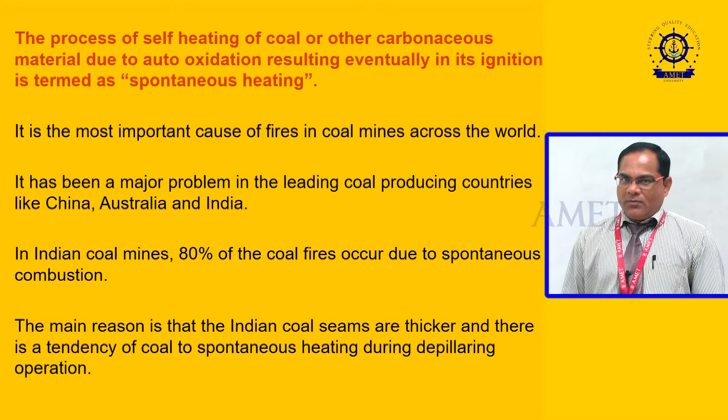Now, there are many factors which affect spontaneous combustion or heating. Mainly two factors: intrinsic factors and extrinsic factors. Intrinsic factor is the nature of the coal, that depends on the seam factor and coal factor, and another is extrinsic factor, that is atmospheric factor, geological factor and mining factor, that is the mining system and how we are conditioned.

Now we will go through the extrinsic factor in detail, that is climatic condition. It depends on the temperature, moisture, humidity, barometric pressure and oxygen concentration. If oxygen concentration is more, spontaneous heating will take place faster. Temperature also affects it. If the atmospheric temperature is more, it will support the spontaneous heating.

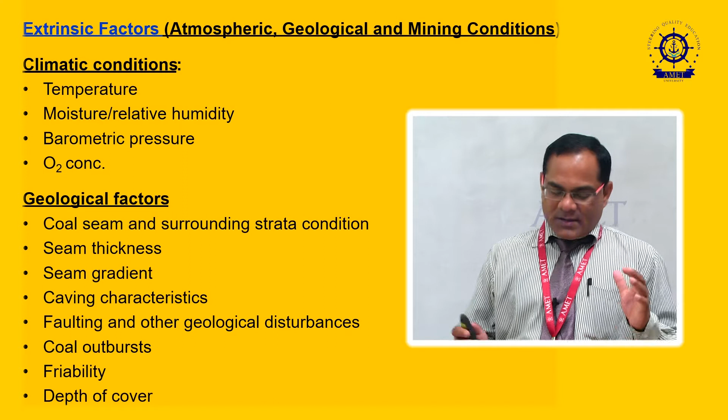Next is geological factors. Geological factor means how the coal seam is surrounded by the strata. If there are faults and fissures, it will support the spontaneous heating due to air leakage around the coal seam. Then the seam thickness is also very important, because if the thickness of seam is more, it is prone to spontaneous heating, because the surface area for the oxidation process is more.

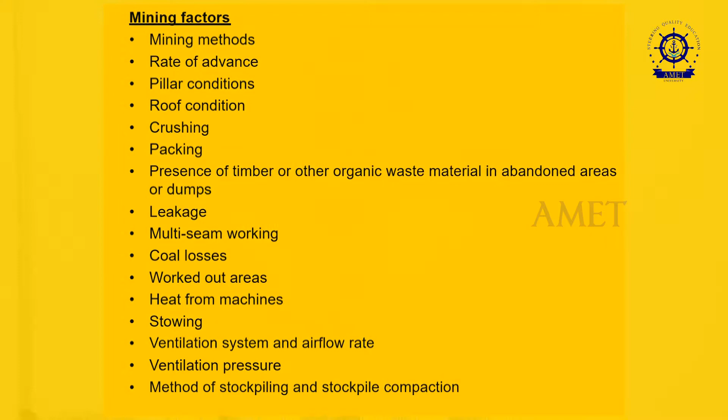Next important factor is mining factors, that is mining methods, rate of advance, pillar condition, crushing of pillar, packing, dumping system, leakage of air, whether it is multi-seam working, coal losses in the goaf area, worked out areas, heat from the machines, stowing system, ventilation system and air flow through the mines. These also greatly affect spontaneous heating. Depending on the mining method, it will affect the spontaneous heating more.

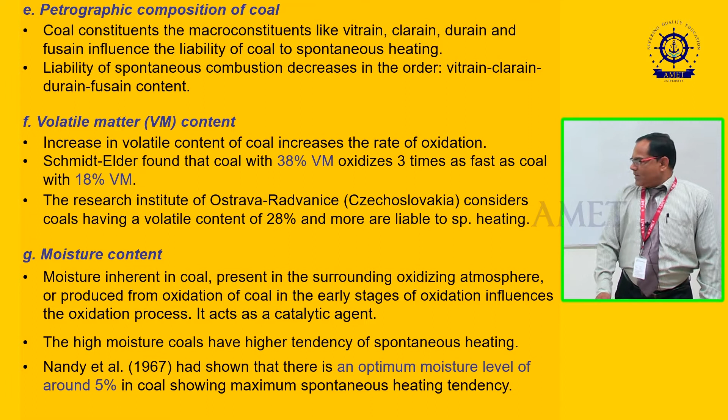Then another thing is crushing. Next is volatile matter content and moisture content. If the volatile matter is more, the rate of oxidation increases, and if the rate of oxidation is more, the spontaneous heating will take place faster. Then moisture content. The moisture content of the coal influences the oxidation process. If the moisture content is more, the tendency of spontaneous heating will be more.

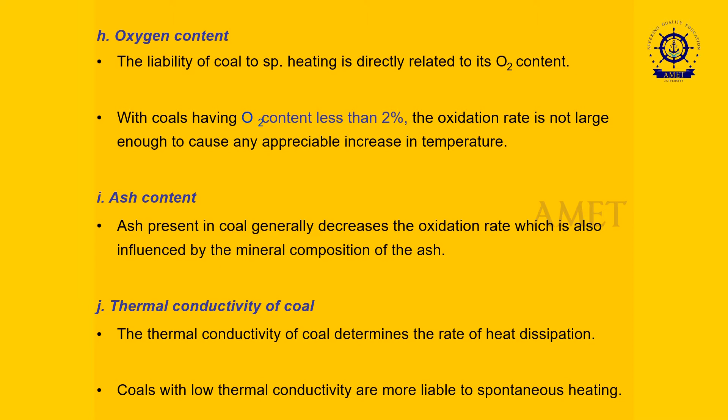Next point is oxygen content. If the oxygen content is more, it will definitely affect the spontaneous heating. The rate of spontaneous heating will be more. If the oxygen percentage is less than 2%, it is not going to affect the spontaneous heating rate. Then ash content. If the ash content is more, the oxidation rate will decrease.

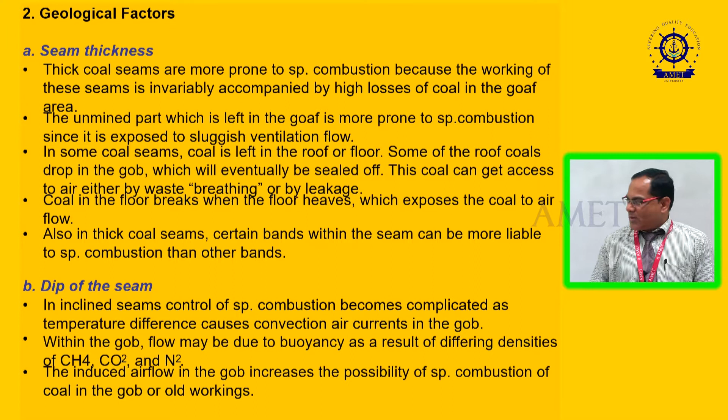Next important factor is seam thickness. If the coal seam thickness is more, it is definitely going to cause more spontaneous heating, because it has a large area of oxidation. Then dip of the seam. If the dip of the seam is more, the spontaneous heating will be more, because the rate of air ventilation will increase.

Next point is depth of cover. If the coal seam is at shallow depth, due to fractures or cracks the air leakage will be more and it will support the spontaneous heating. Therefore, the rate of spontaneous heating will increase. And if the coal seam is under immense pressure, it will also support the spontaneous heating.

Next point is presence of multi-seam. If we are working in multi-seam, it is prone to spontaneous heating, because a lot of fresh coal is exposed to fresh air. Next point is caving character. If the strata has the tendency to cave in, it is going to affect spontaneous heating. Then faulting. If there are faults in the coal seam, it will support the rate of oxidation, so it will increase the spontaneous heating rate.

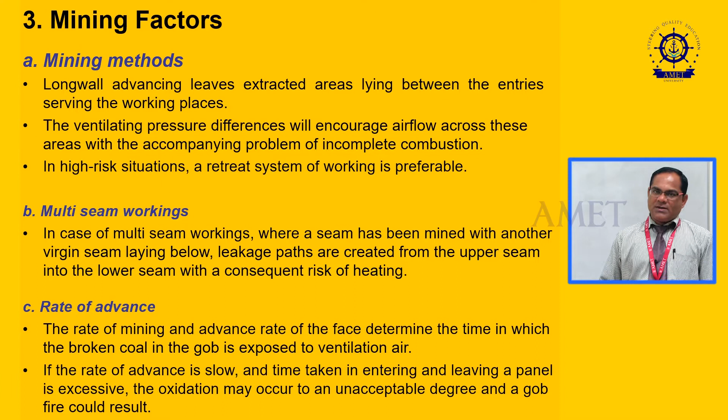Next factor is mining methods. Suppose in the longwall advancing method, the area between the entries is extracted, and if we are leaving coal, it is prone to spontaneous heating. That is why the retreat method is preferred. Next point is multi-seam working. In multi-seam working, there are more chances of spontaneous heating, because more coal is exposed to fresh air.

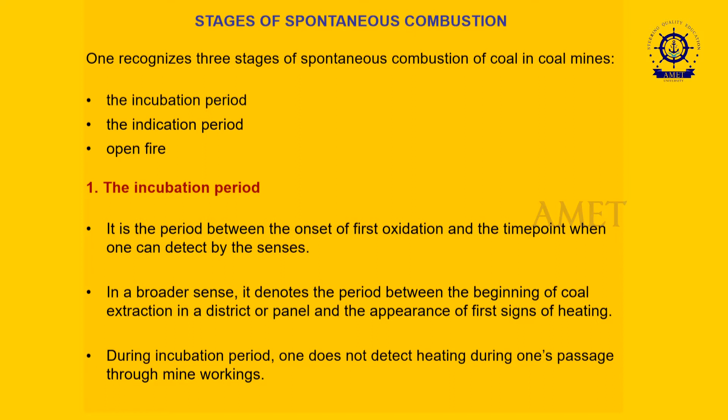Now we are going to see the stages of spontaneous combustion or heating. There are three main stages: the incubation period, indication period, and open fire. What is the incubation period? This is the period which gives the sign of first oxidation, the time which we can detect with our senses, like by eyes or by smelling. We can see with the eyes, and we can sense some smell. The incubation period depends on the following factors, that is the character of the coal.

So, what type of coal it is? The character means the rank of the coal, what are the contents there in the coal. So, it depends on the characteristics of the coal. And next is seam thickness, whether the seam thickness is thin or very thick. The incubation period depends on the thickness of the coal seam also.

Then the nature of the immediate roof. So, what is the immediate roof, that is shale or sandstone, it also affects the rate of spontaneous heating, that is the incubation period. And another important factor is regularity and continuity of the working, that is whether the mining work is going on continuously or intermittently, whether there is any breakage or halt. If there is a halt, the incubation period will increase and it will support the spontaneous heating actually.

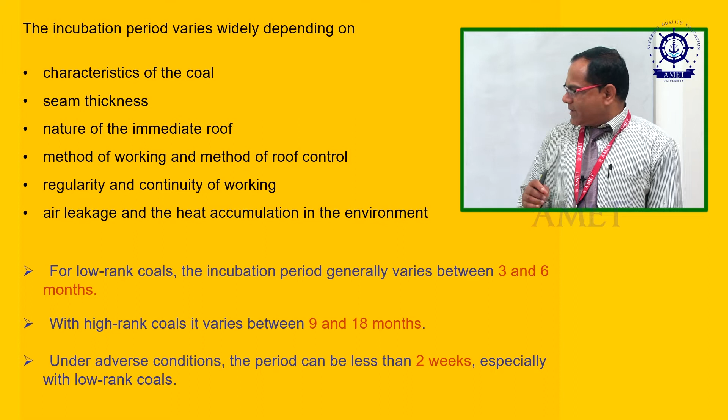And next important factor is air leakage and heat accumulation in the environment. If the heat is accumulating and the proper ventilation is not there, the incubation period will be affected. So, there should be proper ventilation. So, suppose for low rank, the incubation period varies between 3 to 6 months. That is, the low rank coal is supposed to be prone to more spontaneous heating. That is why it has to be extracted or depillared fast.

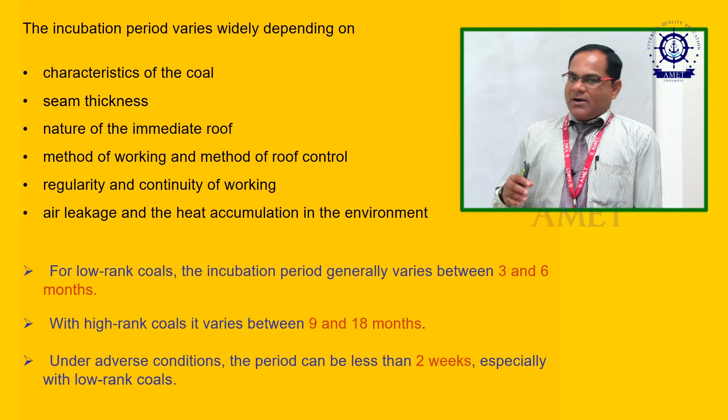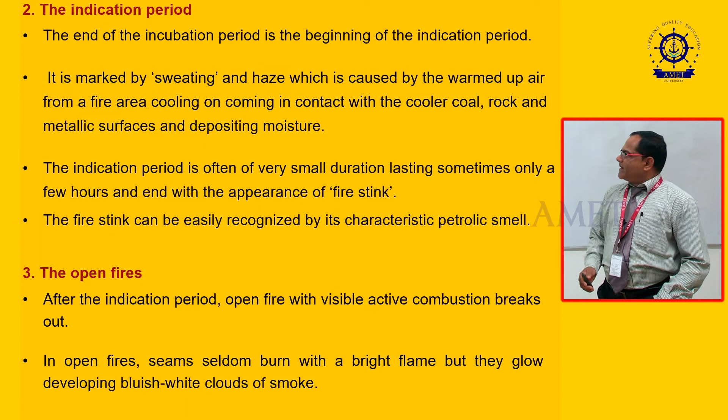Then with high rank, the incubation period varies between 9 to 18 months. So, it can stay longer, and accordingly we have to adopt the mining methods. Okay, the next stage is the indication period. Actually, when the incubation period ends, this period starts. So, it is marked by sweating or by haze in the environment.

Actually, due to the heating process, moisture sweating means on the cold surface we can see water droplets, due to the warming up of air. Because the air warms up, this sweating will start. But this stage stays for a very small period, so we may not observe it, and it ends with the appearance of fire stink, meaning a particular type of stinking smell will come.

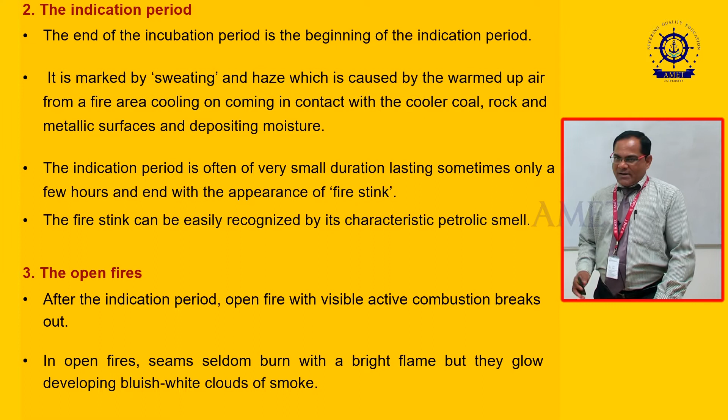And next stage is the open fires. After this indication period ends, the fire can start at any point of time. So, in open fires, the seam does not burn with a bright flame, but it glows, developing a bluish and white cloud. Then the next point is how we will detect the spontaneous combustion.

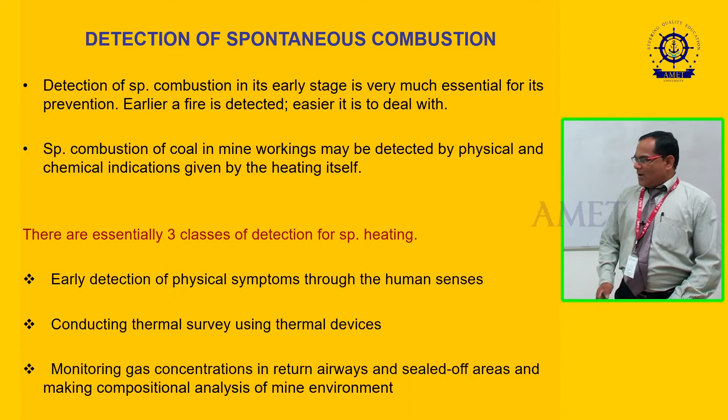Actually, the detection of spontaneous combustion at an early stage is very essential to prevent mine fire. So, it can be detected physically or by chemical indication. There are mainly 3 classes of detection for spontaneous heating. Early detection by physical symptoms, through our human senses. Next is conducting a thermal survey using some thermal devices, and next is monitoring gas concentrations in return airways and sealed off areas and making compositional analysis of the mine environment.

So, how can we do the early detection? Through our physical techniques. This is the oldest technique for fast detection of heating. So, development of heating in a goaf area is generally accompanied by the following: haze, meaning a smoky atmosphere where we cannot see, then sweating of the strata, gob stink or fire stink, sound, a cracking sound, then smoke, and finally the fire. So, these are the physical symptoms.

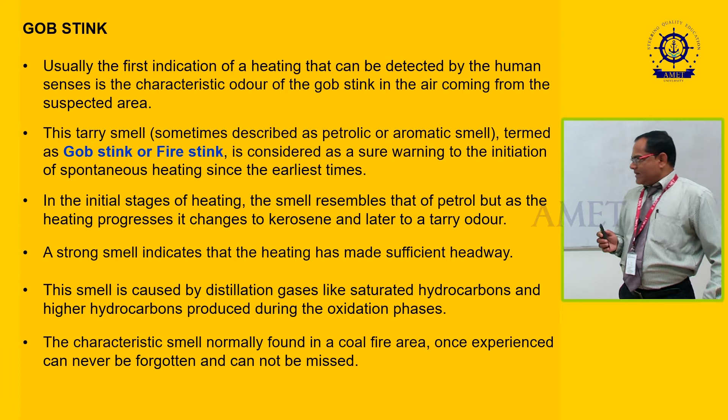Then what is gob stink? The first indication of heating is detected by our senses. Gob stink or fire stink we can smell, and we can detect that some heating has started. That smell gives us an indication. If a strong smell is coming, it indicates that heating has made sufficient headway, that the stage has advanced. Now, the haze is an important symptom. The haze is visible a little from the seat of fire, that is near the intake of the ventilation.

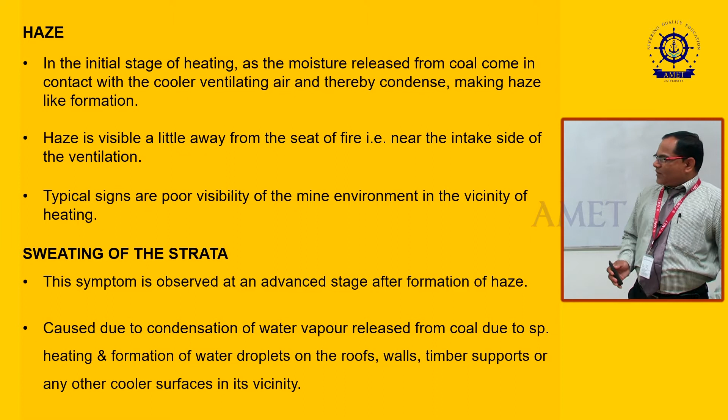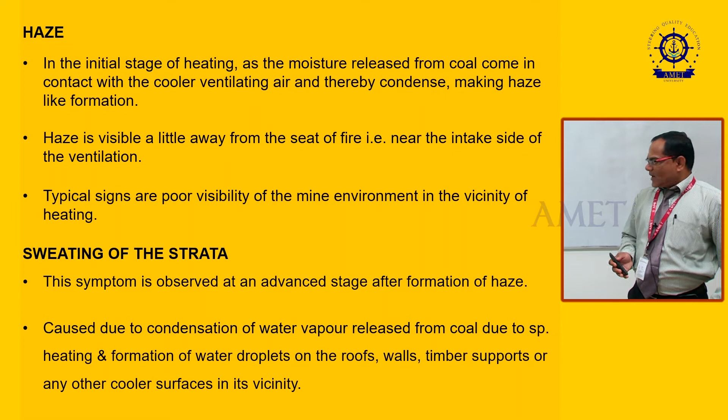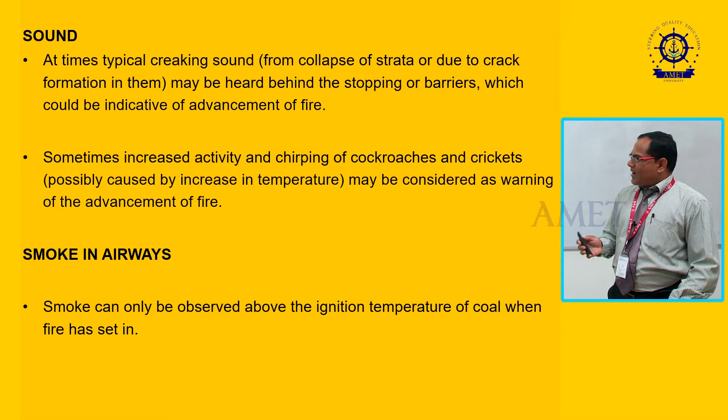Then sweating of the strata. This is observed at an advanced stage. This happens due to the condensation of water vapor released from the coal due to spontaneous heating, and the water droplets form on the roofs, walls or timbers. Then sound. Sometimes a particular sound comes through the cracking of the strata. Then smoke in the airways. When this stage sufficiently advances, smoke starts in the airways. With that we can identify that spontaneous heating has started.

Next, conducting a thermal survey using thermal devices. There are infrared scanning systems in roadways which detect the spontaneous heating stages. Next is monitoring gas concentration in the return airways and sealed off areas, that is the main area where the spontaneous heating starts and the mine fire can take place.

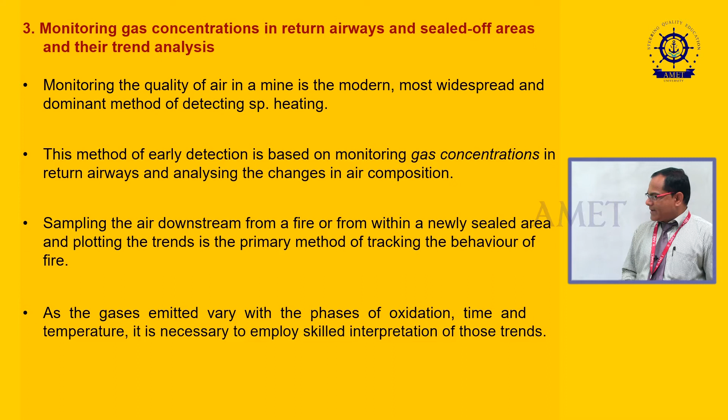Monitoring the air quality in a mine is the modern method; there are many monitoring systems in the airways, and analysis of changes in the air composition. We can do sampling of the air in the lab by taking samples from the mine fire area. The gas emitted depends on the phases of oxidation, time and temperature, so it requires skilled interpretation of the trends. Next important factor is how to prevent spontaneous combustion. This is the main thing. Prevention of spontaneous combustion mainly depends on two factors.

First is elimination of coal from the area itself, and the next is control of ventilation. That control of ventilation includes excluding the oxygen entirely from the area; that oxygen supply we will stop completely. Next point is we will supply a sufficient flow of air to dissipate the heat efficiently, so that the heat will not accumulate and it will not reach the critical temperature to take fire.

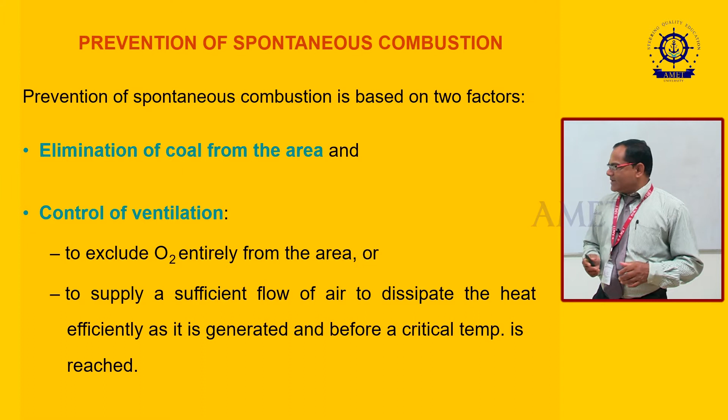Then there are many other methods we can apply to prevent spontaneous heating, such as mine layout. For preventing spontaneous combustion, proper mine layout design is very important. It should be simple, and the area can be divided into sections, depending on the incubation period of that coal. The important system of mining layout is the panel system of working, which is preferable to stop spontaneous combustion.

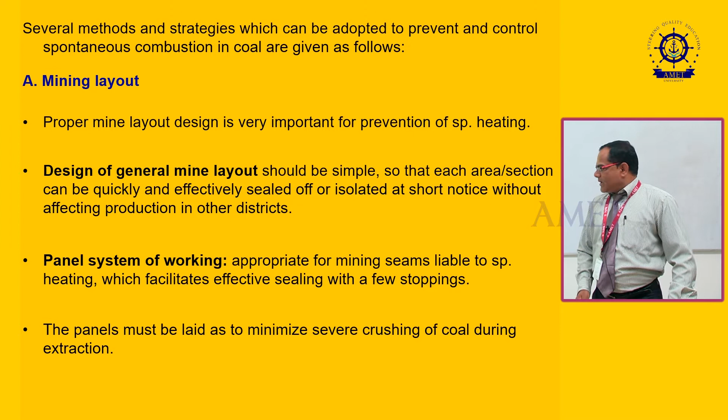Size of panels is based on the incubation period. This is a very important factor, and the rate of extraction is also an important factor. The panel size must be such that extraction is completed within the incubation period, and the size of the panel should be sufficient to make it stable. For each panel, independent ventilation should be there.

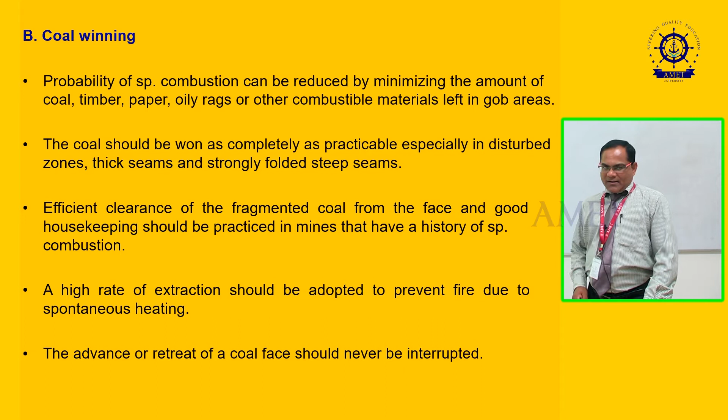When working in the bord and pillar method, the size and shape of the pillar should be sufficient so that crushing of the edges will not take place. Mainly, crushing supports spontaneous heating. In case of longwall mining, the face length should be smaller, preferably between 60 to 65 meters, so that it is mined out before the heat starts building up.

Then coal winning. How are we going to win the coal? For preventing spontaneous combustion, we have to minimize the amount of coal, timber, paper, oily things or other combustible material left in the goaf area. The coal should be won as completely as practicable. We should not leave coal in the goaf area; that is going to create problems in the long run.

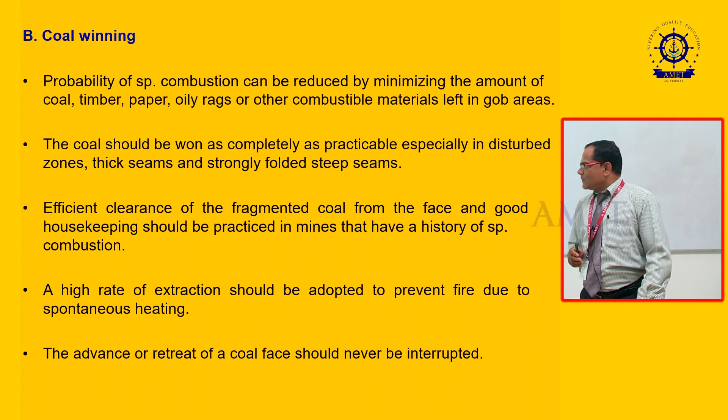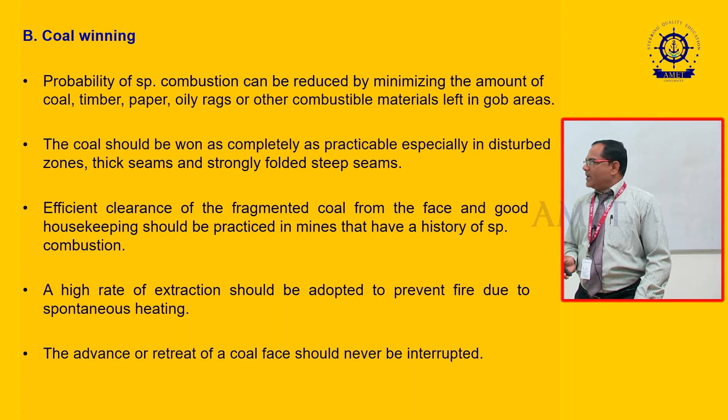Then a high rate of extraction is also adopted to prevent fire due to spontaneous heating. The advance or retreat of a coal face should not be interrupted; if it is interrupted, it is going to support spontaneous combustion. Another important prevention method is ventilation and air leakage control. We have to check for any air leakage in the airway leading to the goaf area. The ventilation layout should minimize the pressure differential between the two airways; the resistance should be very low.

All active mine workings and roadways should be adequately ventilated, and unused roadways, where work is not going on, should be completely sealed off. There should be no leakage of air current. The ventilation pressure should not be very high, otherwise air leakage will take place through crushed pillars or defective stoppings or seals of the sealed-off areas, and it will support spontaneous combustion.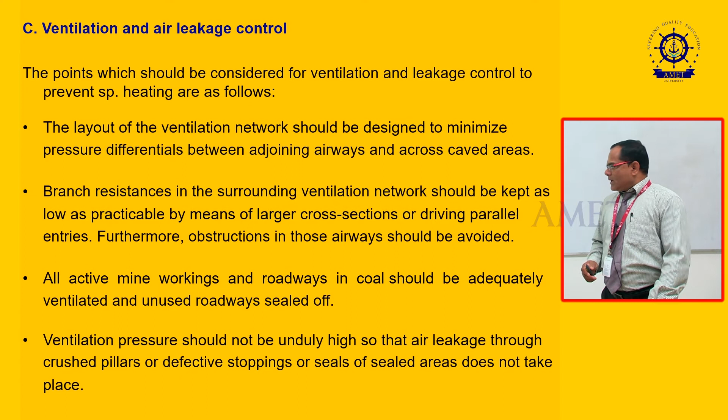Next, doors, stoppings or regulators should be properly sited. Unnecessary stoppings should not be installed. Short circuiting of air and uncontrolled circulation must be eliminated. As far as practicable, leakage paths should be minimized, and the pillar sides should be packed. Air leakage should be sealed from the fractured areas, which would support spontaneous heating.

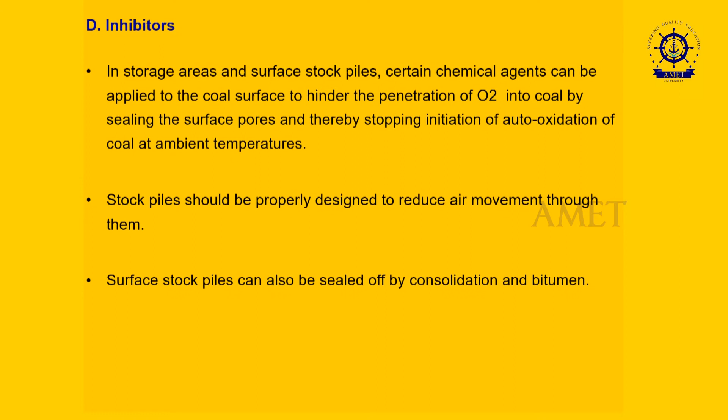Next important prevention factor is inhibitors. For storage areas or surface stockpiles, chemical agents are available in the market to seal the piles. They are applied on the coal surface, preventing penetration of oxygen into the coal, and stop spontaneous heating by sealing the surface pores, stopping the initiation of auto-oxidation of coal. Next, a stockpile should be properly designed to reduce air movement through it. Surface stockpiles can be sealed off by consolidation and bitumen.

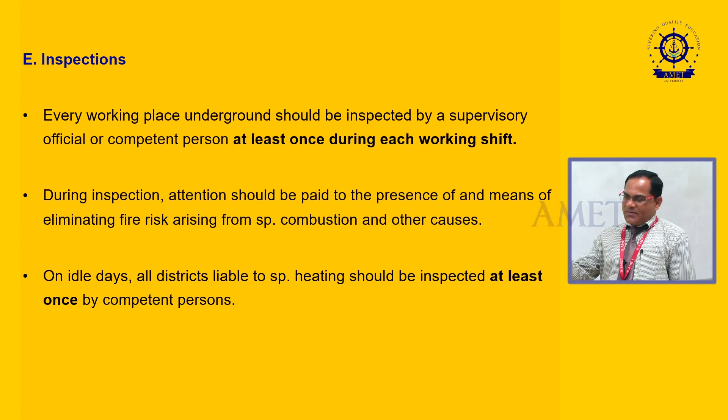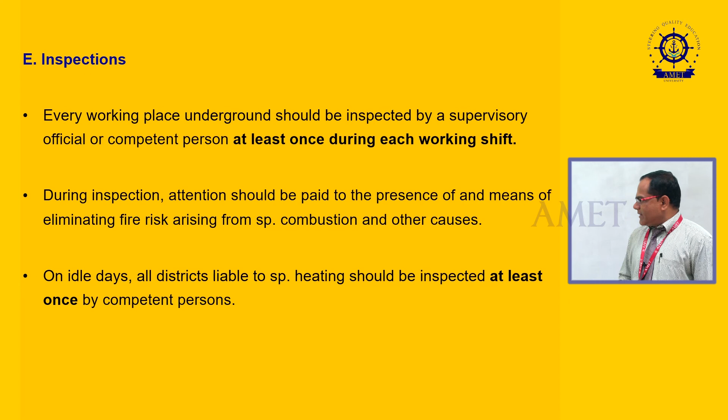Next prevention method is inspection. Every working place underground should be inspected by a supervisor or competent person at least once during each working shift. It is their responsibility to check for any sign of spontaneous heating and means of eliminating fire risk due to spontaneous combustion or other causes. On idle days, when there is no work, all districts should be checked properly for any sign of spontaneous heating.

So, we have found that spontaneous heating is one of the great causes of mine fire in the coal industry, so we have to take care. Around 80% of mine fires have taken place due to this cause, spontaneous combustion.